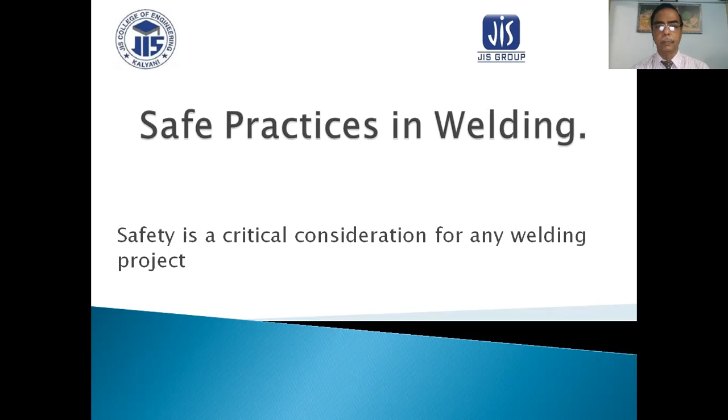Safe practices in welding. Safety is a critical consideration for any welding project. General safety refers to conditions as they apply to all phases of welding and cutting, especially dealing with ventilation, clothing, and equipment with electrical connections.

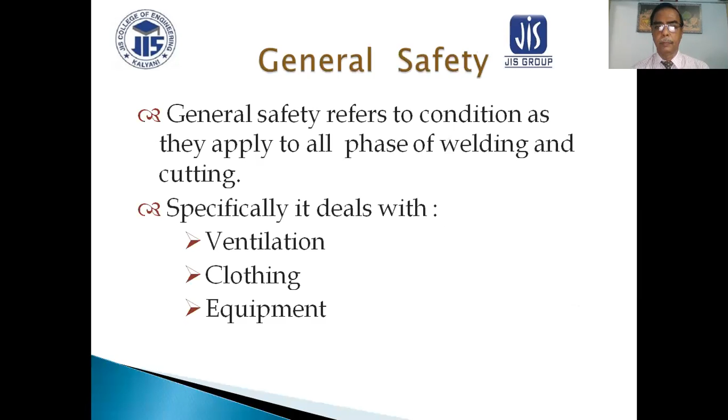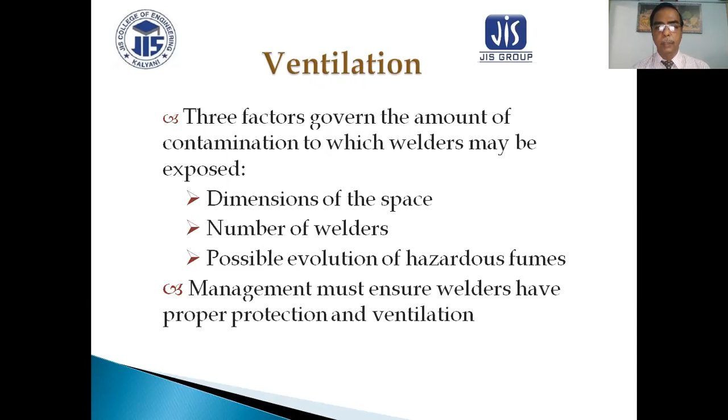Ventilation. Three factors govern the amount of contamination to which welders may be exposed: the dimension of the space, the number of welders, and the possible evolution of hazardous fumes. Management must ensure that welders have proper protection and ventilation. Natural and mechanical ventilation must not be restricted, and must be sufficient to keep concentrations in check.

Mechanical ventilation is required for metals not described here, for spaces of less than 10,000 cubic feet per welder, for rooms with ceilings lower than 16 feet, and for confined spaces or areas with barriers to natural cross ventilation.

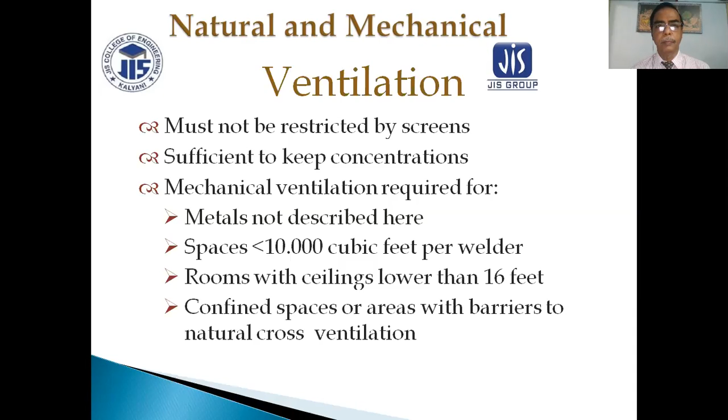This is the ventilation. Contamination should travel away from the breathing zone. Here air is coming from this side and going to that side - this is the airflow, traveling away from the breathing zone. This is fair, because air is flowing from one side and passing to another. This is fair, but this is very good. This is coming and going to this place. Here is another example: air comes from the top portion and passes through to the exhaust.

Local exhaust ventilation may be more effective. This is local exhaust ventilation, which may be more effective.

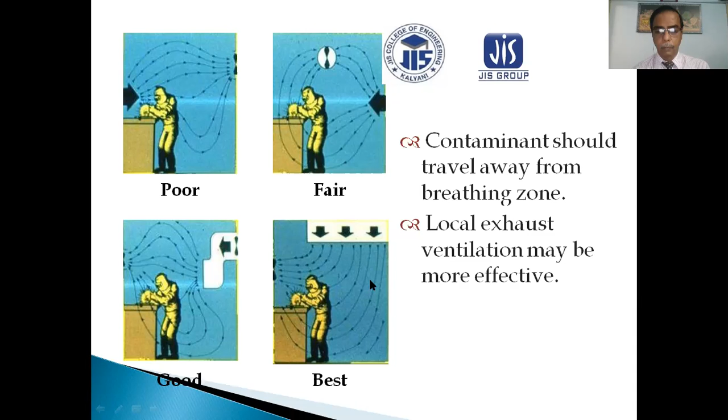For the welding zone: 4 to 6 inches from arc or torch requires minimum airflow of 150 cubic feet per minute with 3 inch duct diameter. 6 to 8 inches requires 275 cubic feet per minute with 3.5 inch duct diameter. 8 to 10 inches requires 425 cubic feet per minute with 4.5 inch duct diameter. 10 to 12 inches requires 600 cubic feet per minute with 5.5 inch duct diameter.

This is the exhaust route. Welding is being done here, and the gases come out from this place to the exhaust.

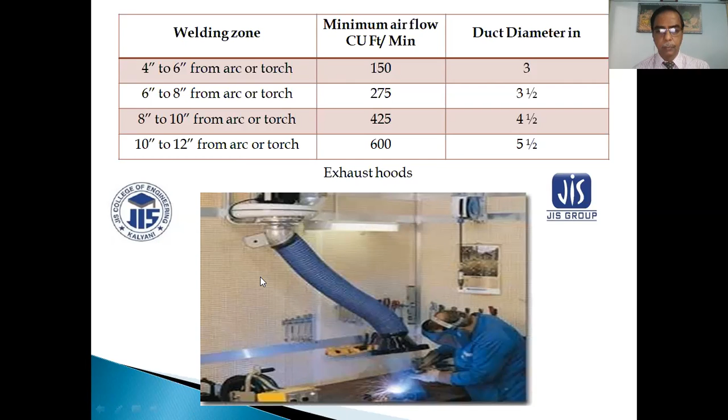Protective clothing is very, very important. This is a leather apron, these are sleeves, this is a leg apron, this is a coat, and this is a cape and bib. This glove is also very important. This is protective clothing.

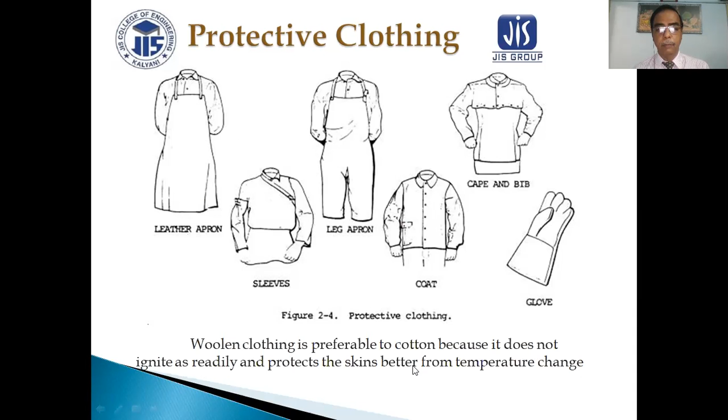Woolen clothing is preferable to cotton because it does not ignite as readily and protects the skin better from temperature changes.

These protect from radiation, hot slag, sparks, intense light, irritation, and chemical burns. Wear fire resistant head covering under the helmet where appropriate.

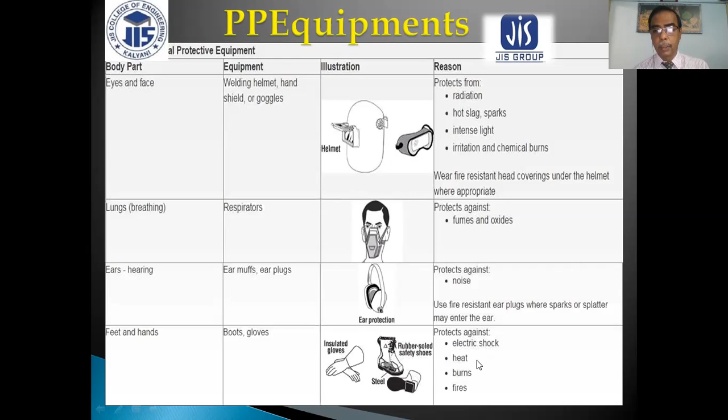Safety in oxyacetylene welding. Basic rules ensure safety: check that the fuse plug or disc is functional, attach the regulator, stand to one side of the regulator, and open the cylinder valve slowly, not exceeding a pressure of 150 psi.

Purge the oxygen and acetylene lines, then light the acetylene. Never use oil or grease near oxygen. Do not use oxygen to clean or blow off dirt or clothing. Keep your workplace clean.

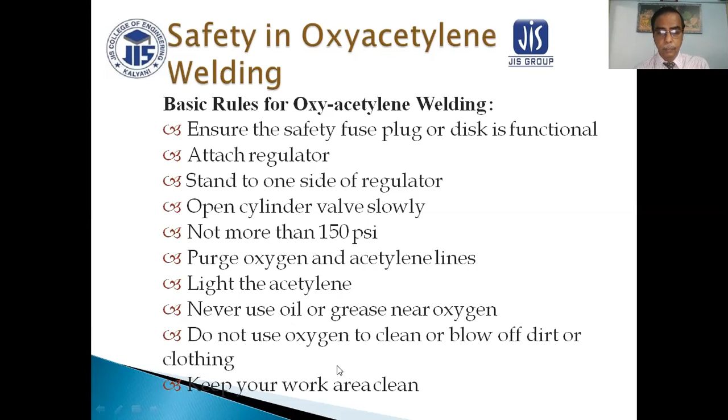Gas cylinder safety: never lift cylinders by the service valve or valve protection; use a sling, net, or other approved means. Keys, handles, and hand wheels must be present. Use the proper regulator, and open acetylene valves no more than 1.5 turns.

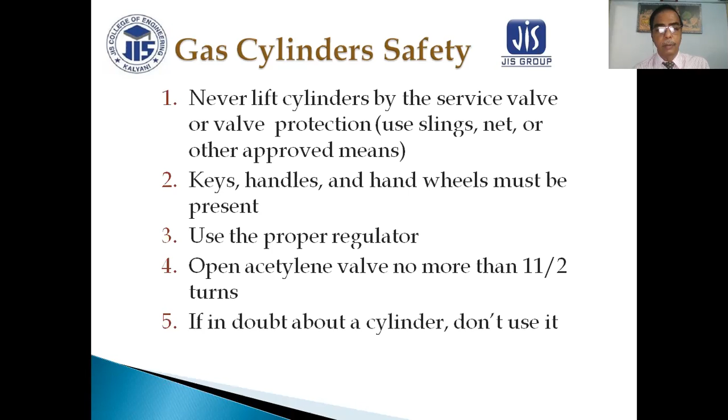If in doubt about a cylinder, don't use it. Use protective devices such as pressure relief valves, backflow preventers, and check valves.

Flashback arrestors: the fuel gas hose is red, sometimes black, for acetylene, and the oxygen hose is always green. Hose protection is required, and pressure reducing regulators must be kept clean.

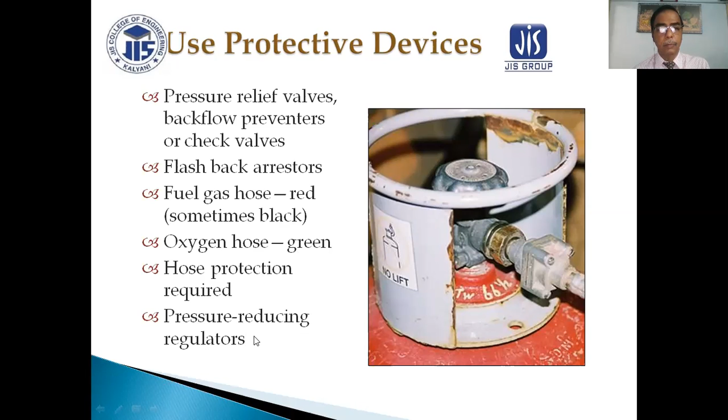Gas cylinder storage safety: the storage area must be well ventilated. Keep fuel cylinders 20 feet or more from combustibles. Close valves and ensure valves are protected. Limit inside storage to 2000 cubic feet. Store cylinders in the upright position, secured from falling, and separate oxygen from fuel gas.

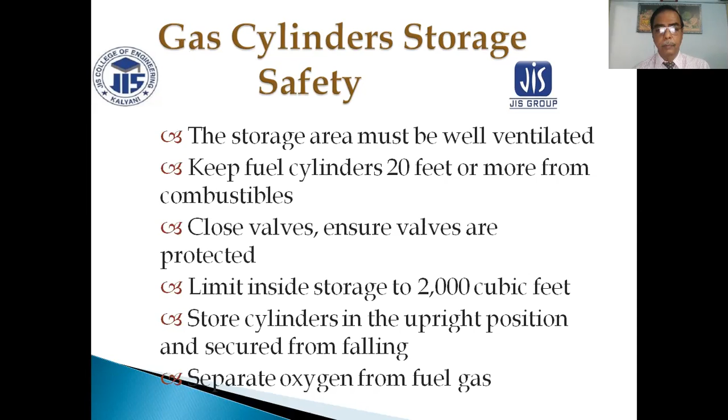Testing for leaks: joints and hoses should be checked for leaks before any welding is attempted. Acetylene may be detected by its distinct smell, usually at levels less than 2%, while oxygen is odorless. Leak detection is best carried out by applying a typically 0.5% solution of detergent in water, or leak detecting solutions from gas supply companies. After curing the leak, the area should be cleaned to remove the residue from the leak detecting solution.

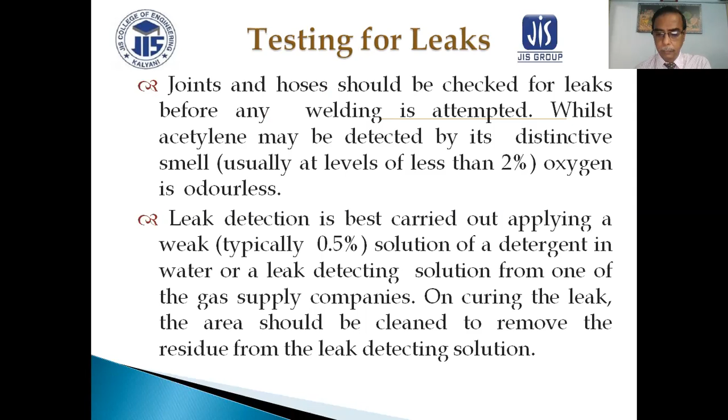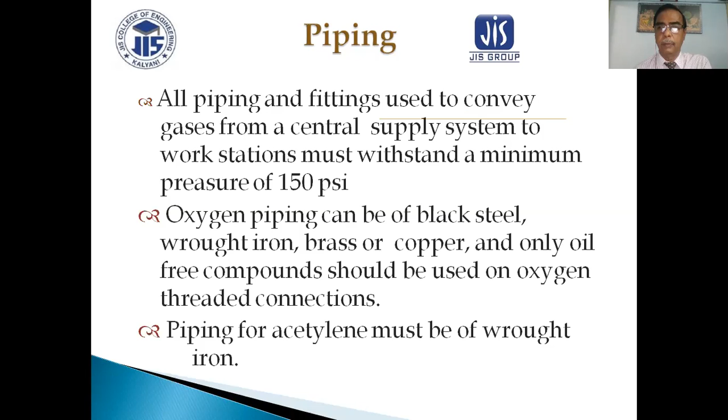Piping: all pipings and fittings used to convey gases from a central supply system to workstations must withstand a minimum pressure of 150 psi. Oxygen piping can be of black steel, wrought iron, brass, or copper, and only oil-free compounds should be used on oxygen threaded connections. Piping for acetylene must be of wrought iron.

Lighting a torch: before attempting to light the torch, perform checks. Make sure the regulator pressure adjustment screws are backed out, make sure torch valves are closed, stand away from the front of the regulator, and separately and slowly open the oxygen and acetylene cylinder valves.

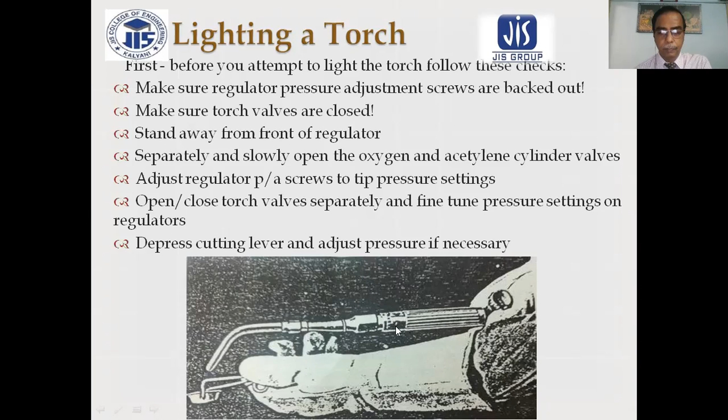Lighting and adjusting the torch with a positive or equal pressure mixer. Separately purge both oxygen and fuel gas lines. Open fuel gas valve by half turn. Ignite flame with striker. Increase fuel gas flow until flame leaves end of tip and no smoke is present. Decrease until flame goes back to the tip. Open oxygen valve and adjust to neutral flame. Depress oxygen lever and make necessary adjustment.

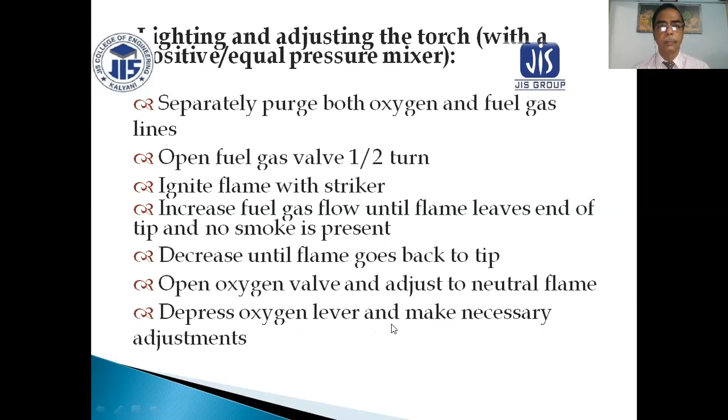Shutting down the torch with a positive equal pressure mixer. Close oxygen torch valve. Close fuel gas torch valve.

If the torch or regulator and gases are done being used for a while, follow these procedures: close oxygen and fuel gas cylinder valves, separately purge oxygen and fuel gas lines, make sure all regulator gauges read zero, and back out regulator pressure and adjustment screws. If you are using it in a commercial environment, report any damage, etc. to your supervisor.

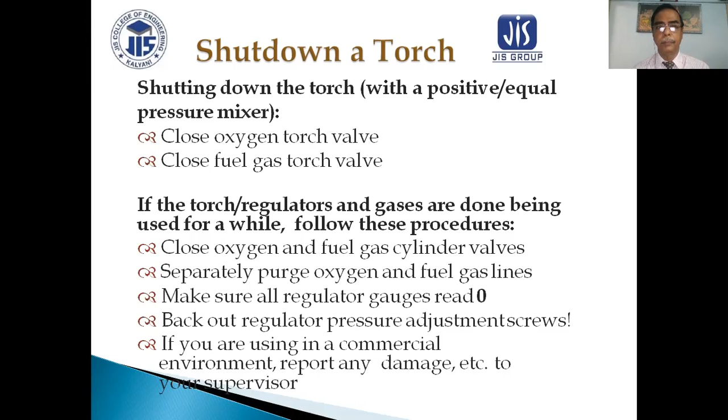Backfires and flashbacks. Backfires occur when the torch flame burns back into the blowpipe. Sometimes it can continue burning back to the point where oxygen and fuel gas are mixed, causing a potentially serious situation. Flashbacks are caused by a reverse flow of oxygen into the fuel gas hose, or fuel gas into the oxygen hose. This then produces an explosive mixture in the hose. This can result in damage or destruction of equipment and could even cause a cylinder to explode. This could end in serious injury or worse, and severe damage to property.

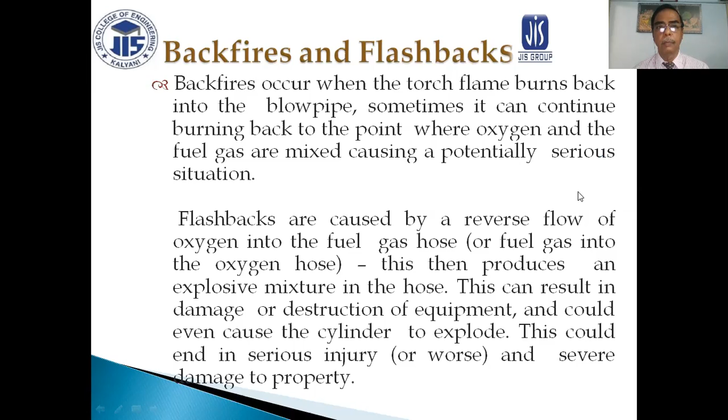Backfire and flashback procedures: after an unsustained backfire in which the flame extinguishes, close the blowpipe control valve, fuel gas first, check the nozzle is tight, check the pressures on regulators, relight the torch using recommended procedures.

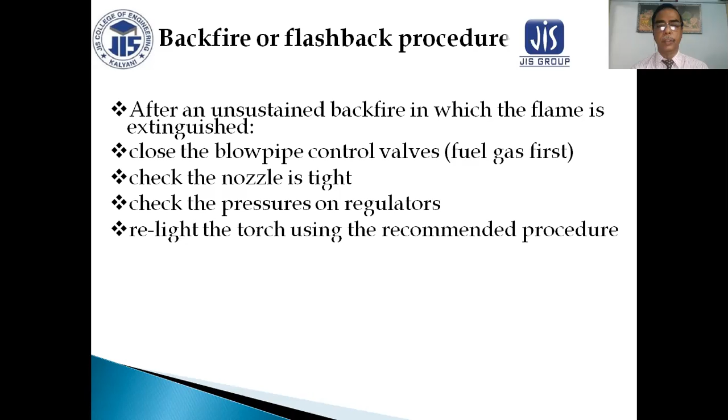If the flame continues to burn, close the oxygen valve at the torch to prevent internal burning. Close the acetylene valve at the torch. Close cylinder valves or gas supply points, isolation valves for both oxygen and acetylene. Close outlet of adjustable pressure regulator by winding out the pressure adjusting screws. Close torch valves. Check nozzle tightness and pressure on regulators.

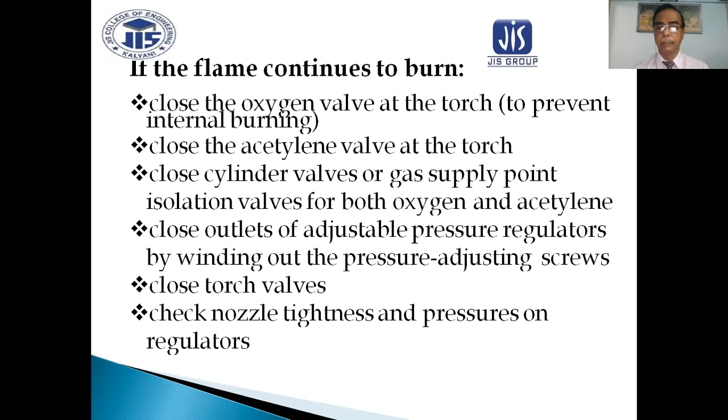Safety in welding and cutting containers. All containers should be considered unsafe for welding or cutting unless they have been rendered safe or declared safe by a qualified person.

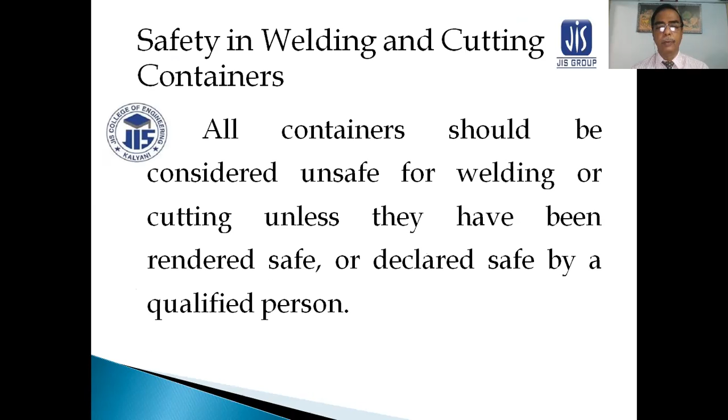Safety in welding and cutting containers. When welding and cutting containers, there is the possibility of explosions, fires, and the release of toxic vapors or fumes. Containers include jacketed vessels, tanks, drums, covered parts, or other equivalent situations. Seemingly empty containers might have material hidden in cracks and crevices, which will release hazardous fumes when heated by welding or cutting. The flammable and explosive materials include gasoline, light oil, or many others.

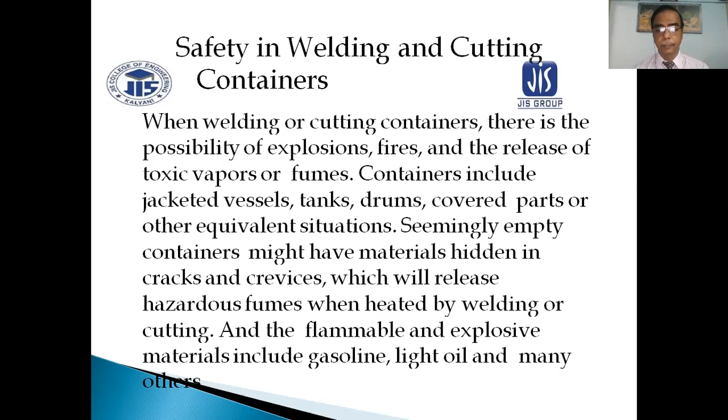This is when welding or cutting a container filled with water, to avoid any damage, any serious causes, any firing also.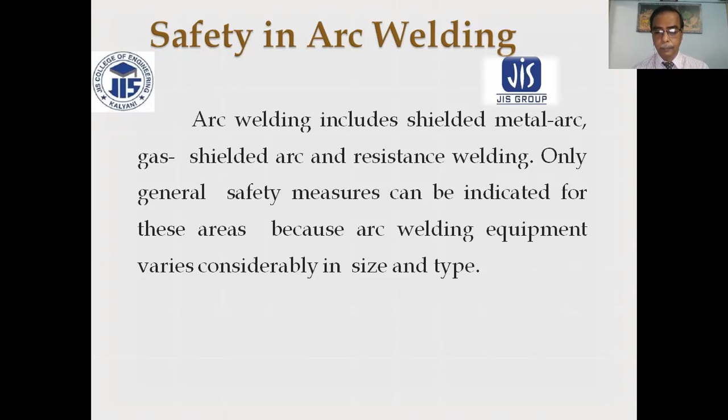Safety practices which are generally common to all types of arc welding operations. Welding can be safe when sufficient measures are taken to protect yourself and others from potential hazards. Students should read and understand the following before welding: warning labels, do's and don'ts, material safety data sheets. Students should also be familiar with the following information: safety in welding and cutting and allied processes, ANSI Z49.1, and Lincoln Electric's arc welding safety, E205.

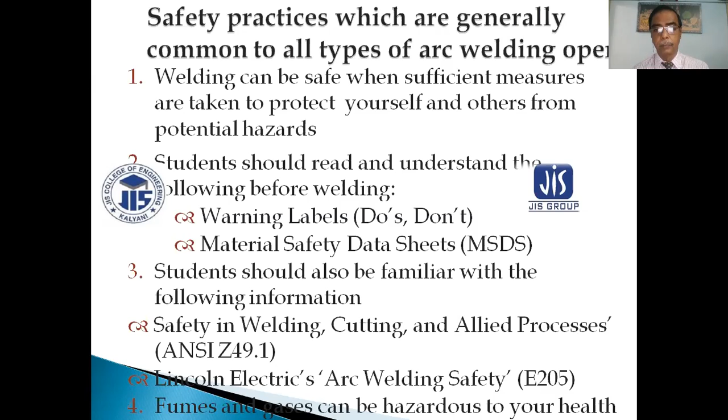Fumes and gases can be hazardous to your health. Keep your head out of the fumes. Use enough ventilation, exhaust at the arc, or both, to keep fumes and gases from your breathing zone and general area. See product labeling and MSDS for ventilation and respirator requirements.

Only manual electrode holders, which are specially designed for arc welding and cutting and are of a capacity capable of safely handling the maximum rated current required by the electrodes, shall be used. In an electrode box, the amperage required for the electrode welding is indicated.

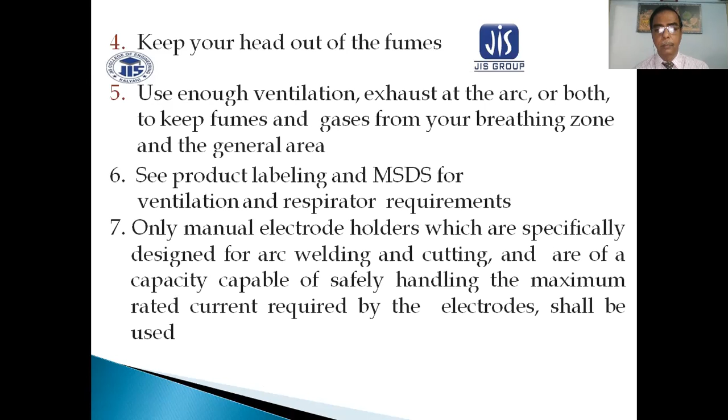Any current carrying parts passing through the portion of the holder which the arc welder grips in his hand shall be fully insulated against the maximum voltage. All ground connections shall be inspected to ensure that they are mechanically strong and electrically adequate for the required current, and earthing should be correct to avoid electric shock.

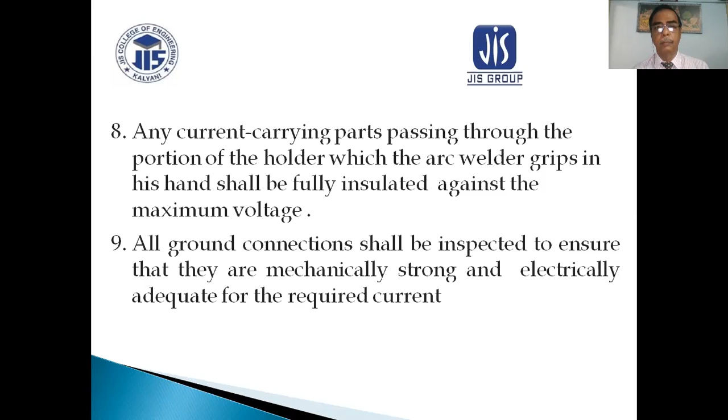Safety hazards, welding safety hazards. Welding operations present several hazards to both those undertaking the activity and others in the vicinity. Therefore, it is important that you are aware of the risks and hazards of welding processes and understand the precautions you can take to protect yourself.

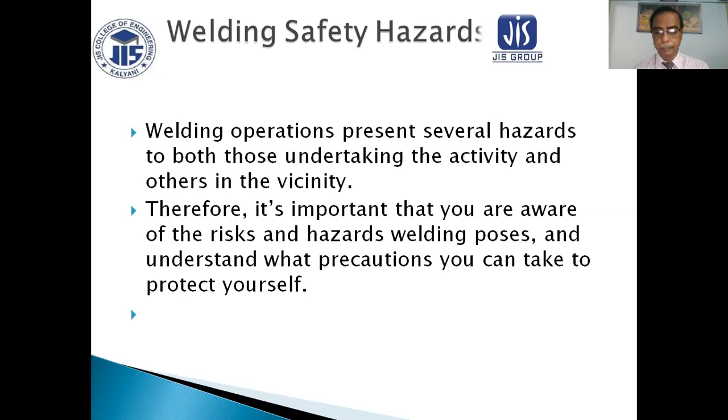Welding safety precautions: always wear appropriate PPE. Welding helmets with side shields protect you from ultraviolet radiation, particles, debris, hot slag, and chemical burns. Respirators protect you from fumes and oxides that the welding process creates. Fire resistant clothing, ear protection, boots and gloves.

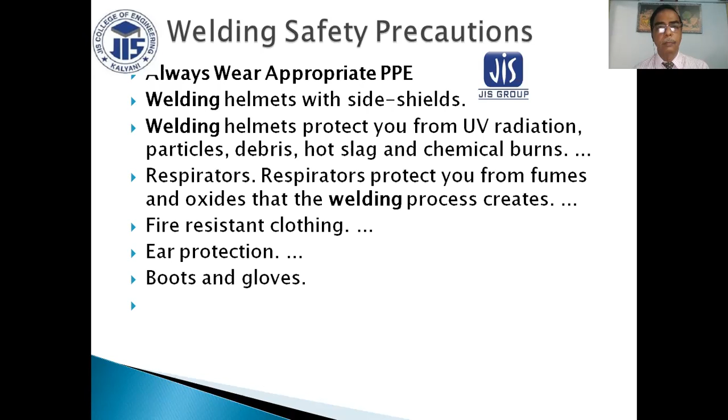During arc welding processes, live electrical circuits are used to create a pool of molten metal. Therefore, you are at risk of experiencing an electric shock. Electric shock is the most serious hazard posed by welding and can result in serious injuries and fatalities. You are also at risk of a secondary electric shock should you touch the parts of a welding or electrode current circuit at the same time as touching the metal you are welding.

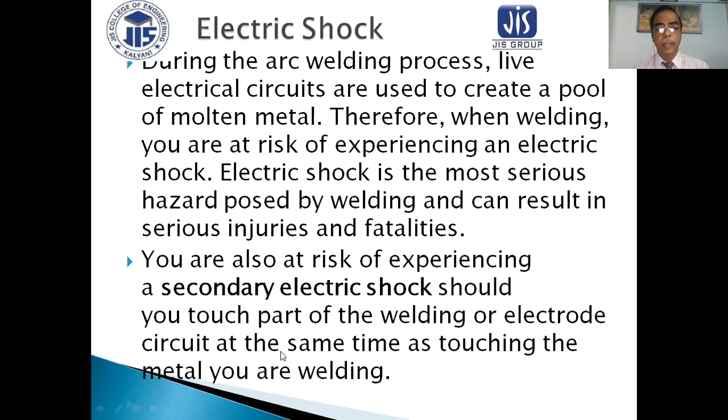Noise hazards: when carrying out welding activities, one is likely to be exposed to loud, prolonged noise. A loud noise is considered to be above 85 decibels, and welding activities such as flame cutting and air arc gouging can produce noise levels of over 100 decibels, causing damage to ears and resulting in hearing impairment, causing permanent noise-induced hearing loss.

Noise-induced hearing loss can have the following side effects: ringing in the ears, known as tinnitus, occasional dizziness known as vertigo, increased heart rate, and increased blood pressure.

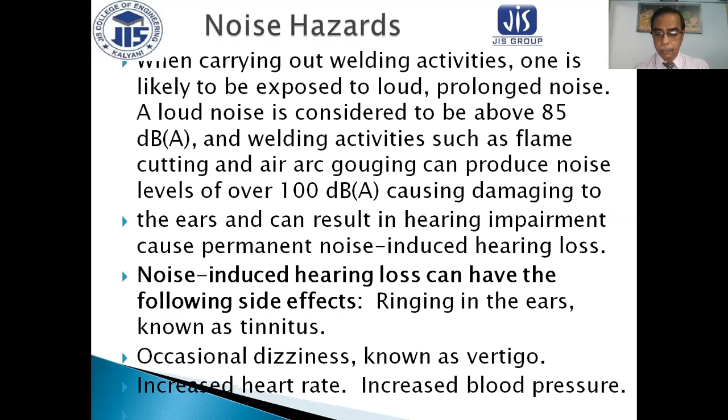Exposure to ultraviolet and infrared radiation: looking at the intense bloom of ultraviolet light produced when welding without appropriate personal protective equipment or welding curtains can result in a painful and sometimes long-lasting condition called arc eye. Many factors can affect the severity of a flash burn injury, such as distance, duration, and angle of penetration.

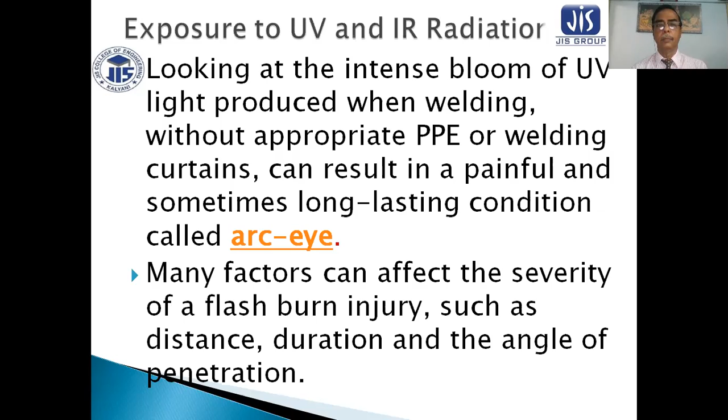Exposure to ultraviolet and infrared radiation: long-term exposure to arc flashes could also potentially result in cataracts and lead to a loss of vision. Other forms of eye damage include foreign bodies entering the eye, including grit, sparks, and dust, particulate fumes and gases, which could lead to conjunctivitis.

Exposure to fumes and gases: undertaking welding activities will expose you to invisible gaseous fumes, including ozone, nitrogen oxides, chromium and nickel oxides, carbon monoxide, which can easily penetrate into your lungs. Depending on the gases and fumes, the concentration and duration of your exposure, the resultant damage can be severe.

Illnesses caused by welding fumes and gases include pneumonia. Regular exposure to welding fumes and gases can result in a lung infection, which could then develop into pneumonia.

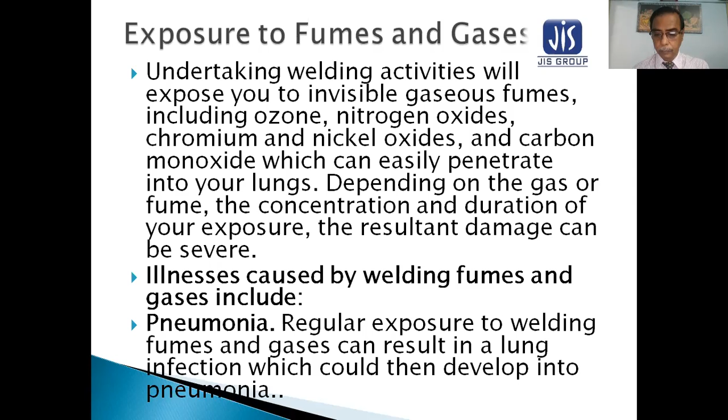Exposure to fumes and gases can also cause occupational asthma. Chromium oxides and nickel oxides produced by stainless steel and high nickel alloy welding can both cause asthma and cancer. All welding fumes are internationally considered carcinogenic.

Metal fume fever: welding and hot work on galvanized metal and high steel weld fumes exposure can often result in flu-like symptoms, throat and lung irritation, including throat dryness, tickling of the throat, coughing, and tight chest.

Burns. The combination of high temperature, welding arcs, ultraviolet rays, and molten metal means you are susceptible to severe burns when welding. These burns can affect the skin or eyes and can be very serious. They can also happen very quickly. Burns usually occur when the welder thinks they can skip taking precautions for a few quick welds. This is bad practice - if you follow guidelines and precautions, you should be able to prevent burns.

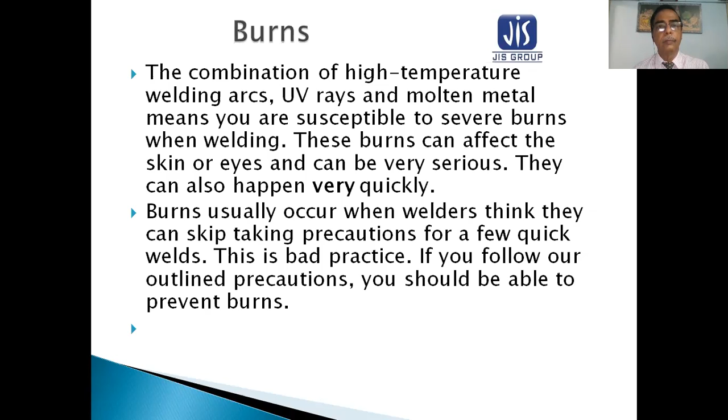Welding safety precautions: ensuring high levels of safety is vital when undertaking any welding activity. Ignoring personal protective equipment and safe working practices can have serious repercussions and might even lead to fatalities. Therefore, you should follow the safety precautions below to protect yourself at work.

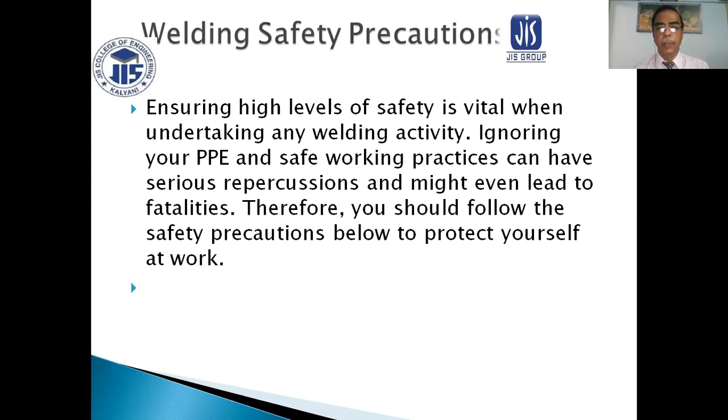Engineering controls do not eliminate hazards, but rather isolate people from hazards, such as local ventilation at the source of the hazard. Ventilation is very important to remove the toxic gases and other oxides.

Administrative control changes the way people work. Examples include procedural changes, employee training, and installation of signs and warning labels.